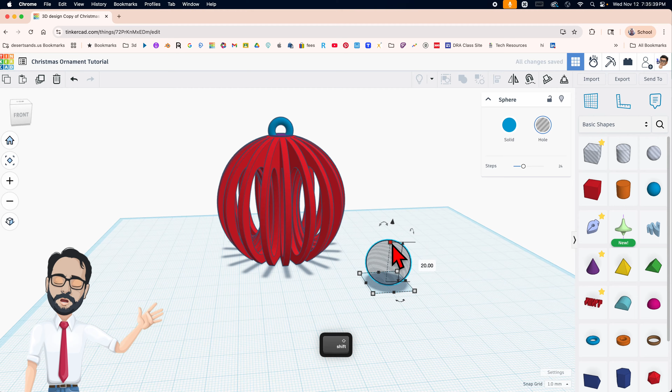Everybody else, let's get started designing. So we're going to start off with the sphere, and we're going to change it - I'm going to hold the shift button because it makes it easier. I'm going to drag this just a little bit and then hit 70, and now the sphere is 70 by 70, which is great. I'm going to maximize the steps here, and then I'm going to drop it down 7 millimeters.

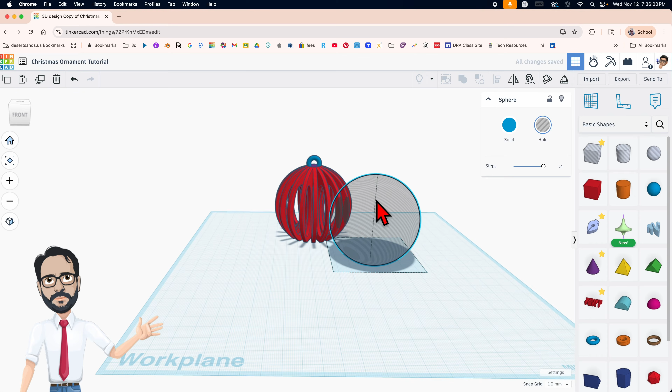There, great. We're almost done. Can you believe that? Okay, I'm going to bring this box out, and again I'm going to hold the shift button while I drag this, and then I'm going to make it 77. Great. Let's move this thing out of the way.

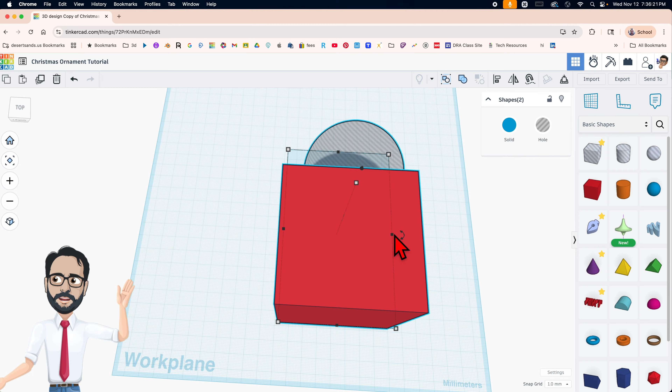So what I'm going to do now is I'm going to select both of them by clicking and dragging. Click the letter L, and then click here and there. And then I'm going to group. Control G. And there. Now I'm going to click the letter T so I can see through this. There. Perfect. That's exactly what I want.

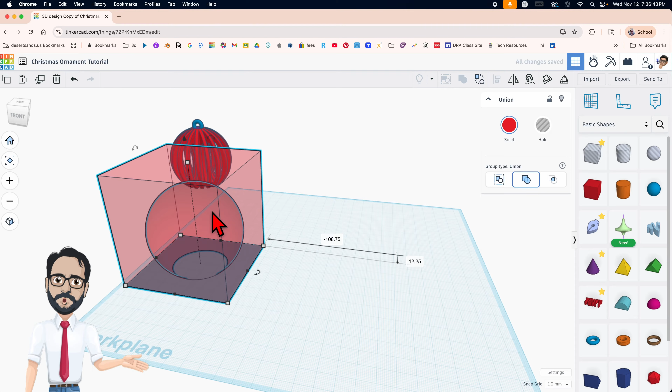All right, so we got that part out of the way. Actually, now, before we do anything else, I'm going to make that a hole. Great. That's what it should look like. If it doesn't look like that, you probably missed a step. Okay, so now, did all that. Okay, now we're going to do the part that's actually the lines here.

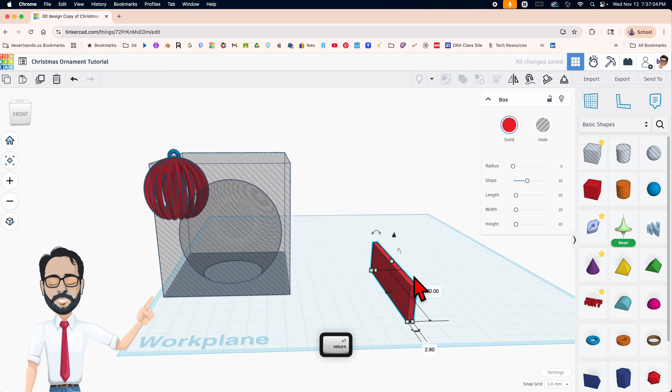And we're going to start off here with 2.8 and 70 by 70. Great. All right, this part's very important because it makes life a lot easier.

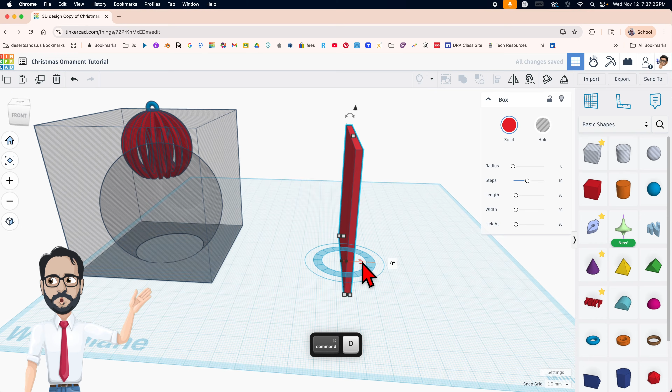So right now I have it selected. Mind you, I'm going to tell you everything I'm going to do. Don't do anything else besides what I'm about to tell you. You're going to hit Control D, and then you're going to rotate this 20 degrees. And then I'm going to hit duplicate, duplicate, duplicate, duplicate, all the way there. Okay? Not a problem, right?

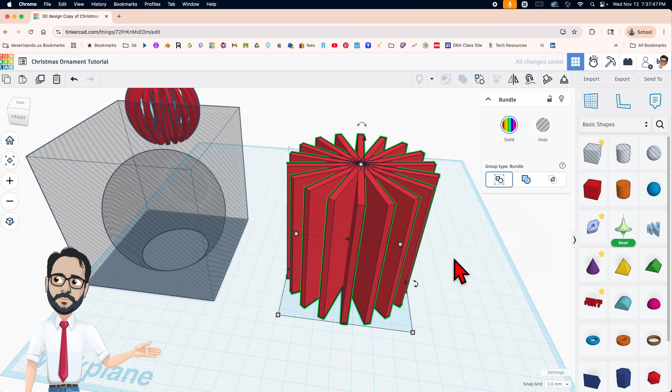Pretty easy. Now I'm going to select all of these and then click bundle. Okay, we're good. See, we have it. Good. Now I'm going to align these two. I selected both of them, like, clicking and dragging. Click the letter L. And I'm going to click on that one there, that one there. Ooh, just about got those. Okay, now I'm going to select everything inside of here and then Control G to group.

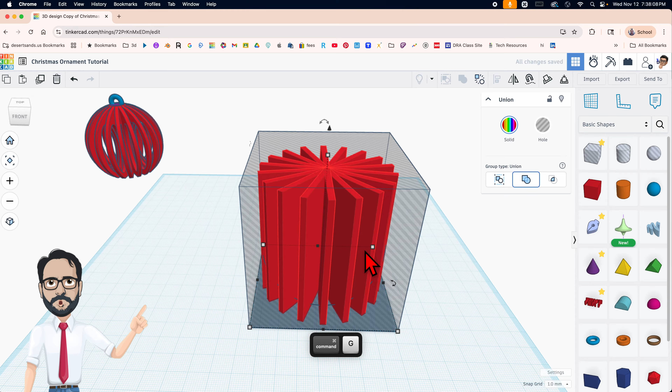We're going to be left over with the sphere. I know this is just pretty enough just to print like that. However, we're going to make it even cooler. So the next step is to get a torus. That's this blue donut here. And let's start off with the settings.

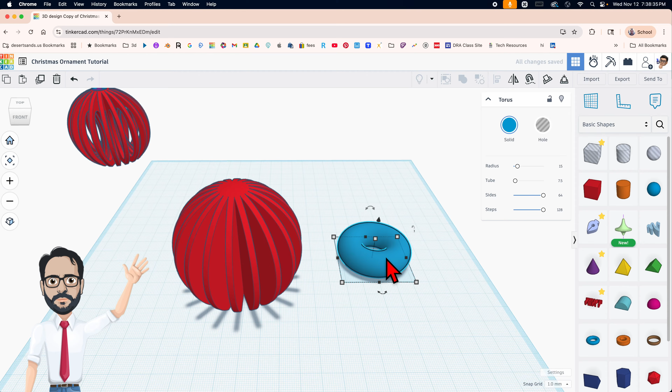Here, we're going to put 15. This is going to be 7.5 for the tube. And we're going to max out the sides and max out the steps. Okay, now we're going to focus on the dimensions. So here, this one right here is going to be, okay, both sides are going to be 60.32. And again, 60 point, nope, no, I'm good. And the height is going to be 45.

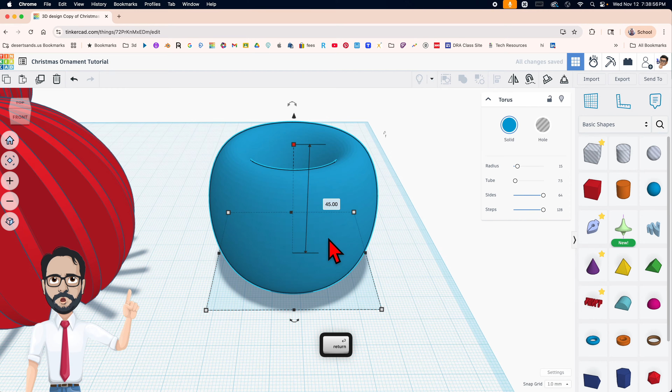Great. But we also need to move this up 5 millimeters. 1, 2, 3, 4, 5. Great. I'm going to make that a hole.

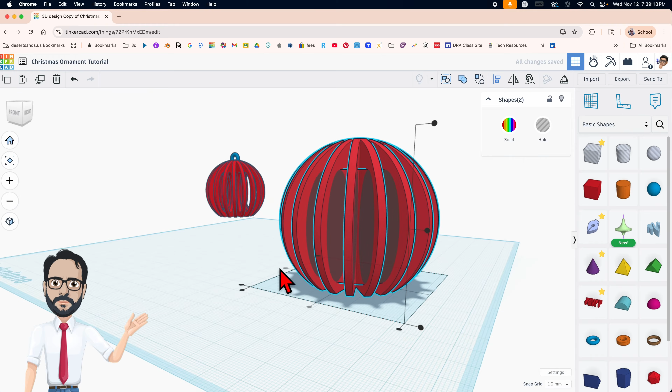Now I'm going to group these two, but I'm going to do it correctly. I'm going to click the letter L. And there. Click both of these. Now I'm just going to check it out, make sure it's all good. You want to see some red here and some red on the outside.

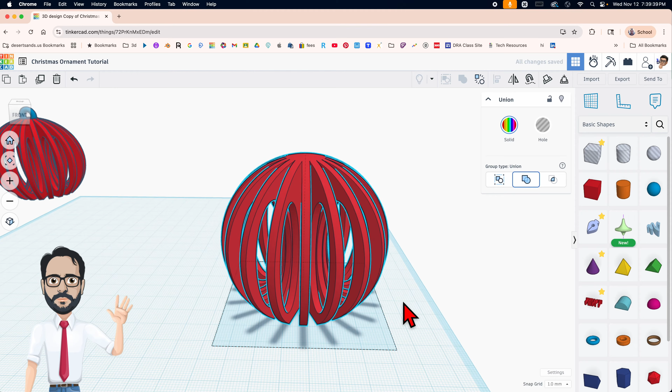Make sure you stay to the very end because I need to tell you some settings. Otherwise, this thing is not going to work. I'm going to select everything and group. All right. We're almost there, people. By the way, looks super cool, doesn't it? I know. I'm so excited.

Okay, so now we're going to make the part that goes on the inside here. We're going to start off with the cone. And I'm going to hit the shift button to drag this down a little bit. And then I'm going to type in 12.5.

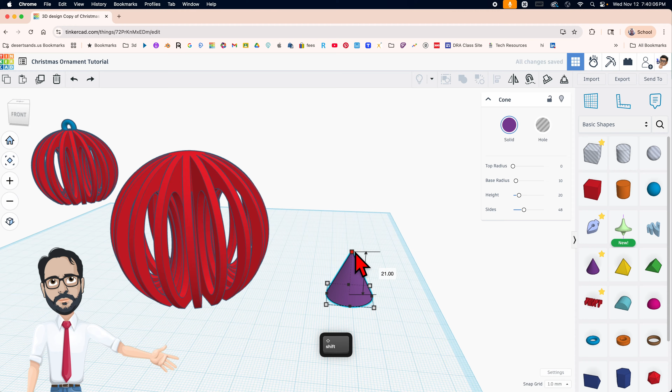I was wrong. That was the wrong number. Sorry, guys. Oops. I'm going to hit the shift button, hold it up. It's 12.95. Now I'm going to check them. Yep. They're all 12.95.

I'm going to duplicate this, rotate it 90, and then I'm going to drag this up. What did I write down here? 50? Yep, let's drag this up 50. And since I'm lazy, I'm just going to type 50. Perfect. And let's go ahead and make this a hole and that a hole.

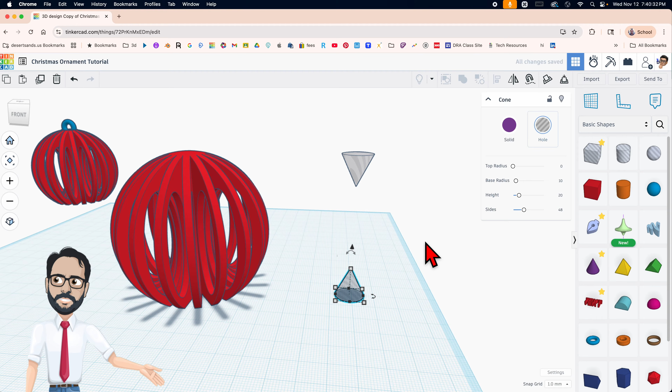Okay, now we want the cylinder. The cylinder, I'm going to hold the shift button down and then drag this up. And then I'm going to change this to 7.94.

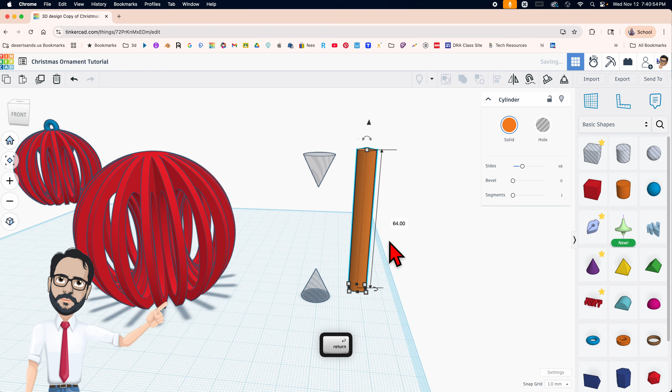Now I'm going to drag this up 64, I believe, yeah, 64. Also a hole. So let's get all these three lined up. I clicked and dragged over all of these. I'm going to click the letter L. And there you go. Now, I'm perfectly fine with this sticking out because you might need it later, so I'm good here. I'm just going to bundle these.

Actually, before I bundle, sorry if you bundled, my bad. I'm going to duplicate them because I'm going to need these shapes later. Now I'm going to bundle these. Control B.

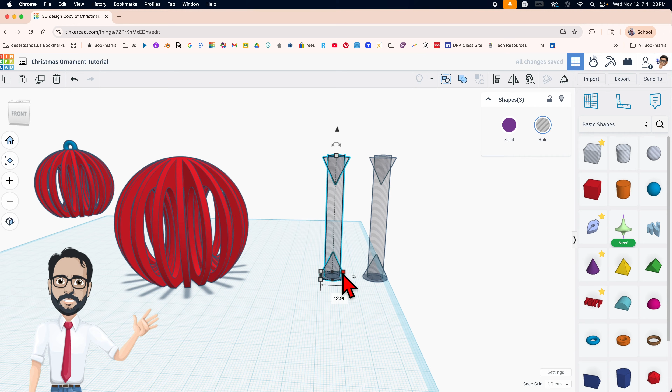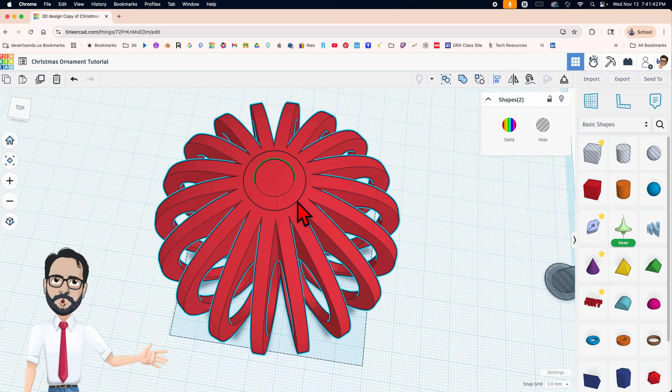Good, green. I'm going to align these. L. Did it work? Why doesn't it look like it worked? Oh, I should group, Control G. That's what I was missing. Okay, it's processing. Good. It's made a hole down here, up there.

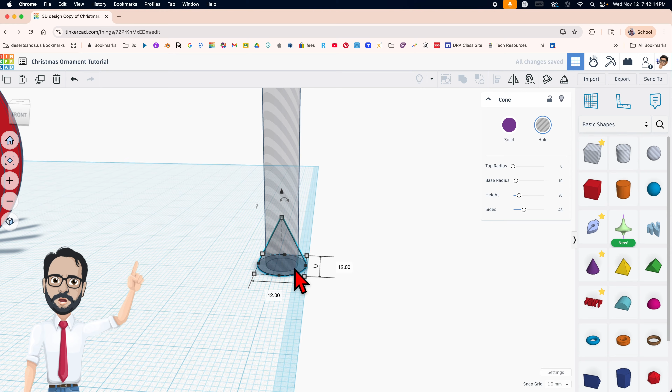Great. We're good. Okay, now we're going to change the dimensions of this one right here. So let's zoom in here. And this cone down here is going to be 12. Oh, I did it. Otherwise, I would have hit shift, and all these have to be 12. So if you don't get lucky like I do, just make sure it says 12 all the way around.

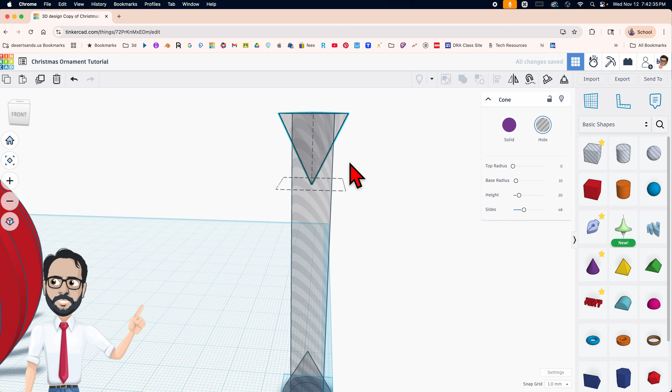Now, this one, we're going to move it up 1 millimeter because remember we moved it up 50. Well, this one has to be 51. So I'm just going to drag this up 1. Perfect. However, this also has to be 12. Right now, it's 12.95. So I'm going to go from this angle right here. I'm going to hold down the shift and I'm going to drag this up. Oh, didn't do it this time. So I'm going to hit 12. Now I'm going to check all my dimensions. 12, 12, 12. We're good.

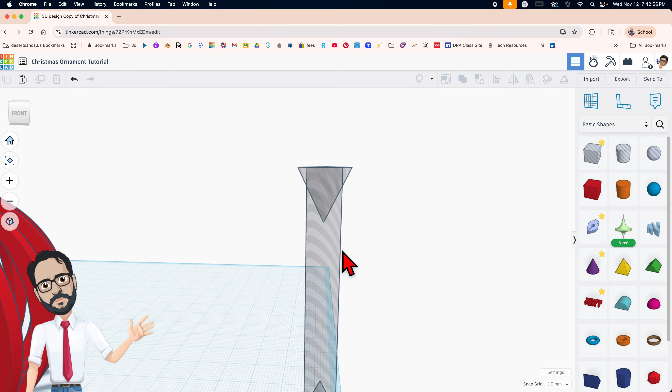Okay, now the cylinder is not going to be the same dimensions, obviously. And where do I have that written down? Oh, cylinder is going to be 7.3 by 7.3. And the height, this one does matter. I want it to be a little bit lower. So I'm going to change that to

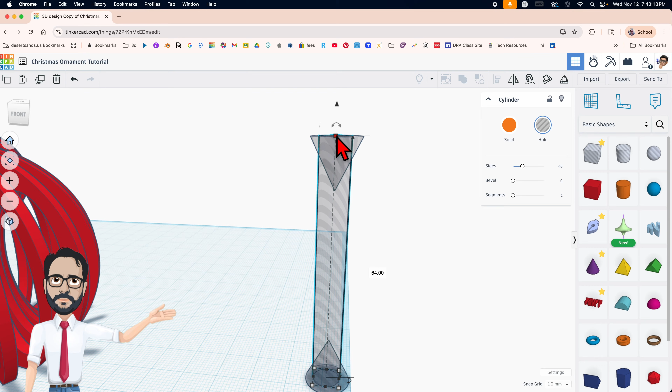62. Yeah, that's fine. Okay, I'm going to align these. I don't feel like they are perfectly aligned, so I'm going to click the letter L. They're not aligned. You see that? Good. I'm going to bundle these. Oh, I guess I should make them solid because we definitely need it to be solid. And bundled. Control B.

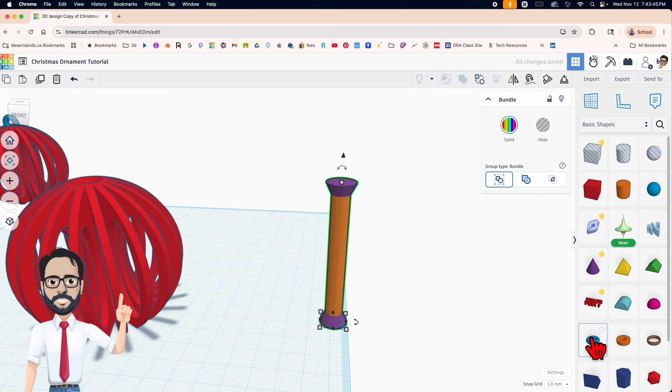All right, so now we need the torus. I'm going to rotate this. First thing I'm going to do is rotate it 90 degrees. I'm going to click the letter D.

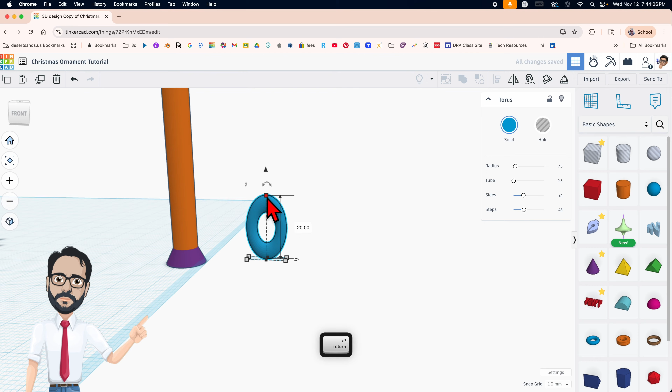Now here are the things you need to change for this one. This is going to be 12.71 and 3.3. And up here, again, 12.71. And we need to move this up here. Now, I don't have a number for you, but I need you to check something when you put

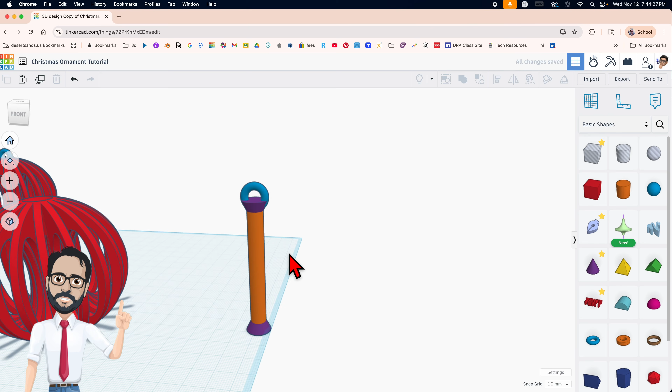this up here. First of all, let's go ahead and align this. Select this, click L. Okay, here's the goal. Let me click the letter F so we can focus on that. We don't want any blue sticking out here. So I'm going to click, and where's my arrow? Oh, there it is. I'm going to move this up.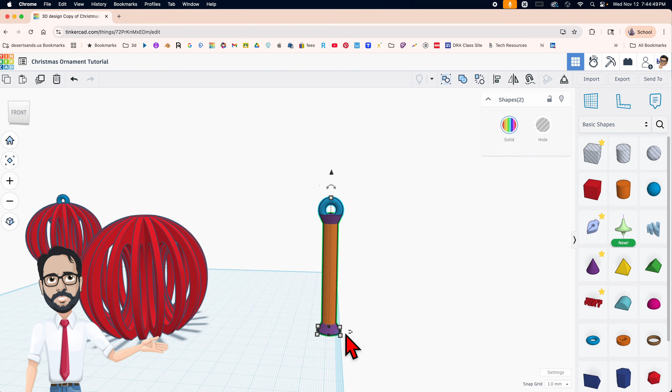Good. Again, good. Okay, so this is going to be grouped, Control G, and we're going to drag this over here. Let's make sure it all fits. I'm going to select everything and then click the letter L. Okay, good. We need to make sure that there is space all the way around here.

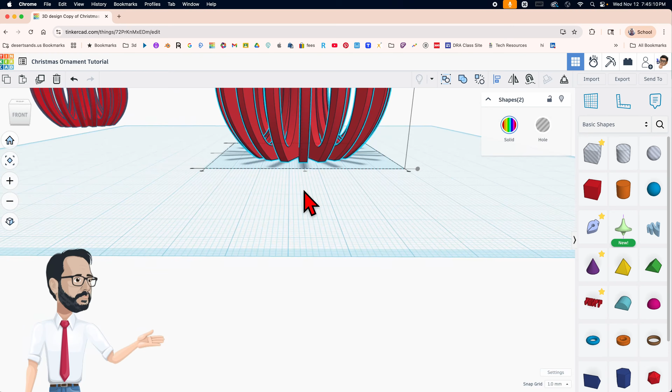And this one here is good. I feel like it might be too high. It'll work like this, you guys. Don't be afraid. But let me click on something over here. I'm going to click the letter T because I want to make sure everything's good. Yeah, it looks like everything is good. Why is that? There you go.

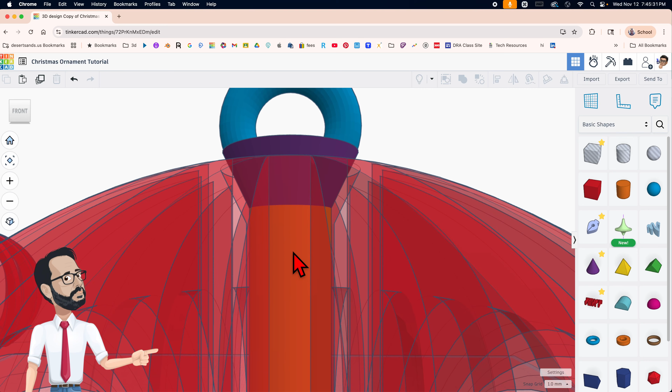I'm looking at the space over here. See that straight line, straight line. I think it'll just look better if you move it down one. So I'm going to ungroup that. Move it down. Actually, both the torus and the cylinder should go down. Maybe one. Let's see. Oh, yeah. One is better. Well, we're good to go.

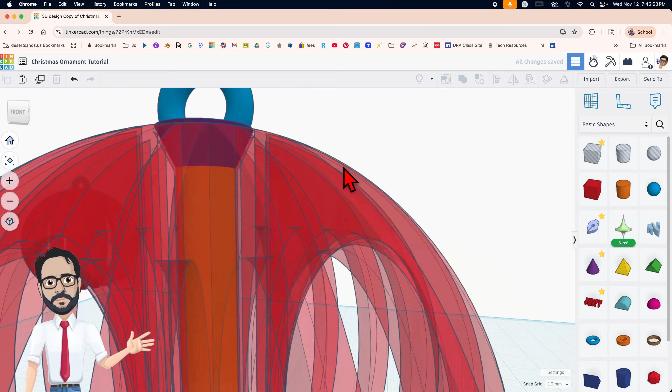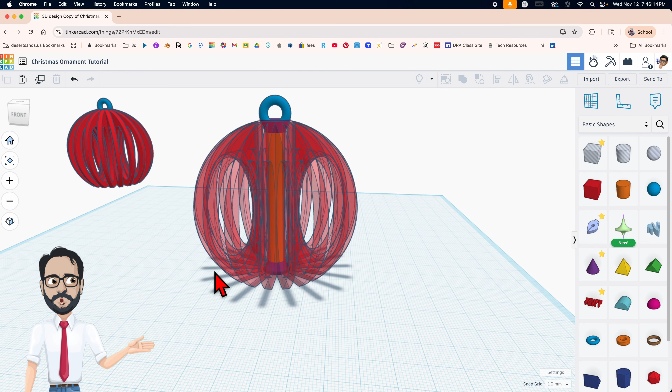Now, if you're going to print this, I recommend a few things. Personally, I like the way it looks in silk. So if you do that, make sure that your setting says silk PLA, if that's what you're going to be using, because it'll slow down and lower the temperature, I believe, so it'll be shiny. The other thing is you don't want this to be printing really fast, because when it gets up to right here, the whole machine will be moving and these things will not be still while the printer is printing, and it'll look kind of funny in this area. So slow down your printer, adjust your settings.

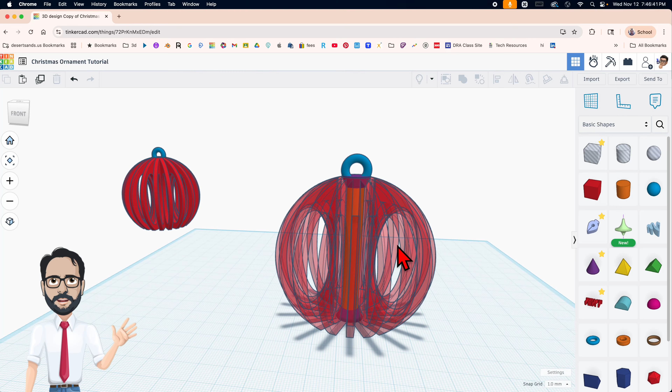Also, this will look better if you have it at less than 0.2 in your settings for your height, your printer, the thickness of the print. That's it. Hope you enjoyed it. I think it looks cool. Have a good one.